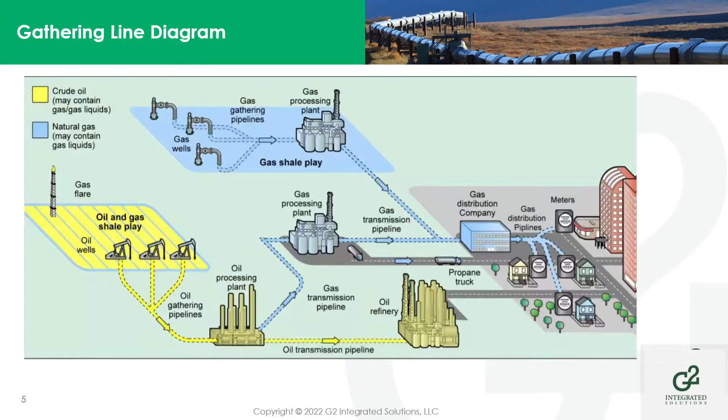So as currently defined in 49 CFR 192, gathering lines are considered to be pipelines that transport gas from production facilities to transmission lines. This is a graphic that's out of PHMSA's gathering line FAQs. The FAQs do reference the definitions provided in API RP 80. Those are incorporated by reference.

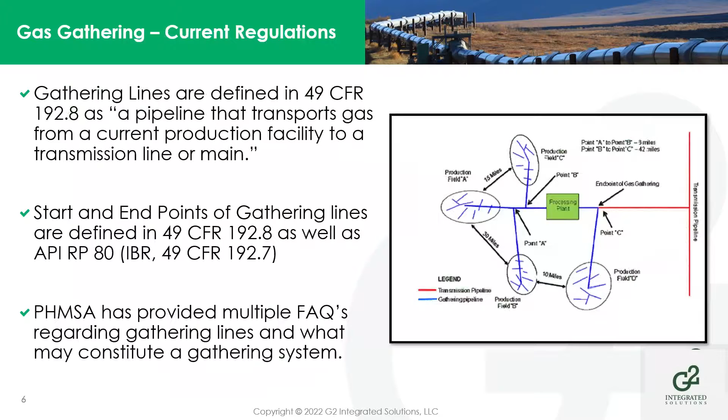PHMSA has provided a lot of these graphical interpretations to help operators determine if they do or do not have regulated gathering lines or what may be considered part of a gathering system. So if an operator is looking for a place to start to determine if they do have gathering lines, the FAQs are a great place for some good information.

So currently, there are two gas gathering classifications listed in the regulations, both of which are limited to class 2 or greater locations. Type A being the metallic with a MAOP of a hoop stress of 20% or more of SMYS, and then non-metallic with the MAOP of greater than 125 pounds. And then the type B is the same, they just have different classifications for the location of the area.

So for a large portion of these gathering lines that are located in remote areas, they don't really ever come into play because they're not located in a class 2 or 3 or 4 location. And so what PHMSA has done is they've expanded the requirements for these gathering lines to bring some of these more regulated lines into play.

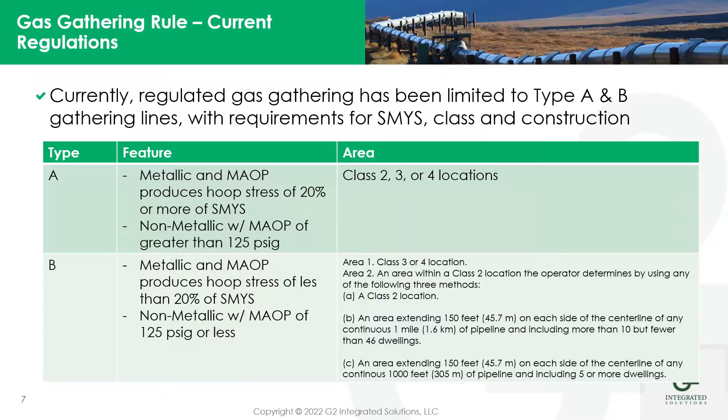applicable. Again, I just want to reflect the fact that this is a fairly marked change, as there are going to be a large amount of unintentional operators that don't realize that they're going to be part of this regulation. So if you're aware of any operators that have historically never been subject to regulations, reach out to them, let them know that, hey, these are coming around and they should take a look and see if they're going to be affected.

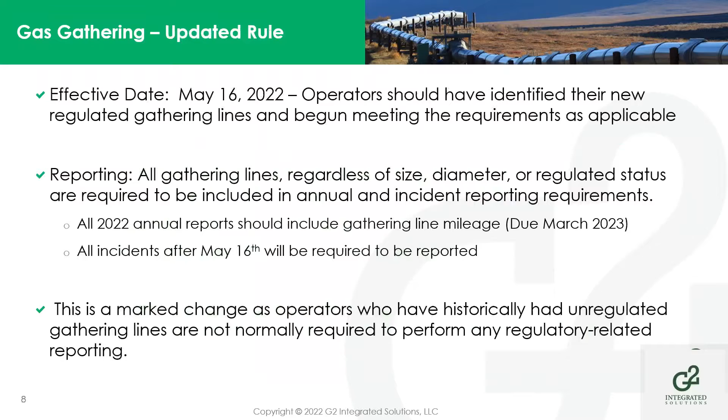So the first part of the gathering line rule talks about reporting. So the update in 49 CFR 191 provides the requirements for reporting for gathering lines. This includes annual reporting under 191.17, which is applicable to all gathering lines, type A, B, the new type C, and the type R lines. 191.23 for safety-related conditions is for type A, B, and C gathering lines, not the type R lines.

And then just as a point of reflection here, 191.29 for the National Pipeline Mapping System, operators of gathering lines are not required to add their maps for the gathering lines up to the NPMS system. They're still required to retain maps for their lines, but they're not required to put them into NPMS.

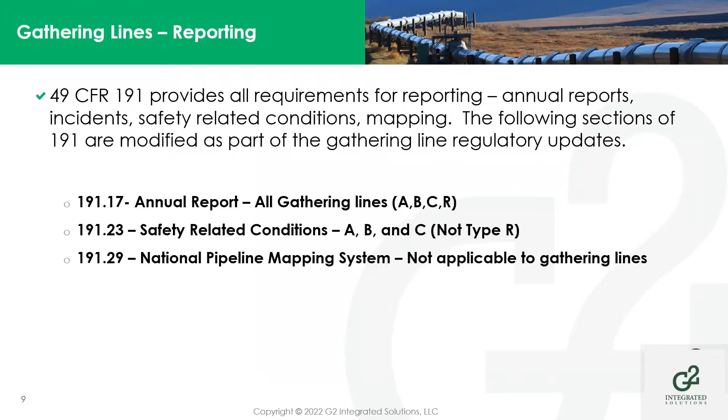So we talked about type C and type R. What do they mean? So again, the new rule creates both the type C gathering line and the type R gathering line. Type C lines are considered to be those gathering lines with an outside diameter greater than or equal to 8.625 inches and any of the following. So it could be any of the following three classifications. They're either metallic and they have an MAOP with a hoop stress of 20% or more of the SMYS.

If they have an unknown stress level and they have an MAOP greater than 125 pounds, or they can be non-metallic, plastic, composite, and the MAOP is greater than 125 pounds. So this expands the larger diameter, higher pressure gathering lines. This brings those into play here under regulation. And then the type R lines. Type R lines are pretty much any onshore gathering line that doesn't meet the existing A, B, or C definitions. So those operators of type R lines are required to report those lines as part of an annual report, but otherwise don't have any other additional requirements that they're going to have to meet.

And so additionally, the preamble of the final rule defines incidental gathering on new, replaced, relocated, or otherwise changed gathering lines. So the applicability for incidental gathering was done to avoid some disruption that's associated with reclassifying some previously unregulated existing gathering lines as transmission lines, and hopefully reduce the overall cost of the final rule for the existing infrastructure. This incidental gathering exception will be limited to 10 miles or less.

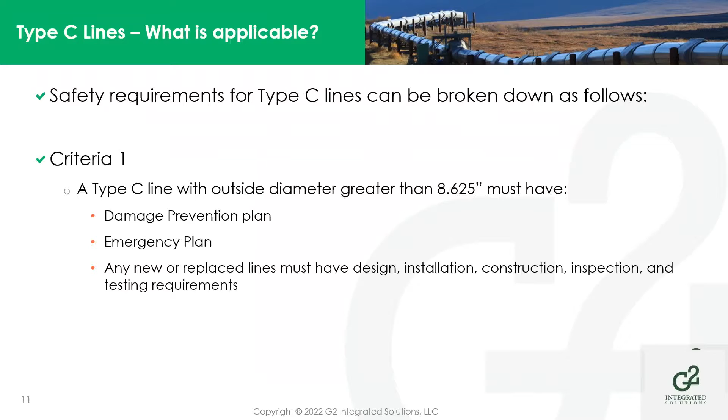And then on top of this, PHMSA has added a couple of different layers of additional regulations. So the second criteria applies to a type C line with an OD between 8.625 and 12.75 inches. All of the requirements of criteria 1 for the type C lines apply, and then additionally they're required to have a public awareness plan. They're required to install line markers. They must have a corrosion control plan, and they must conduct leakage surveys. So all of these items are to be conducted in accordance with the existing regulations in 49 CFR Part 192 as applicable.

There is something here for the level 2 and level 3 criteria called a PIR exemption. So the potential impact radius exemption is a gathering line where the segment does not have a BIHO or otherwise inside the PIR. And the PIR is calculated using a different factor. So normally, the PIR is calculated with a factor of 0.69. This new rule requires you, if you want to use the PIR exemption, to use a factor of 0.73. So it gives a more conservative estimate of the potential impact radius. So again, these exceptions are there for those lines that may be in very remote areas where there's not a problem with having anybody inside of that potential impact radius.

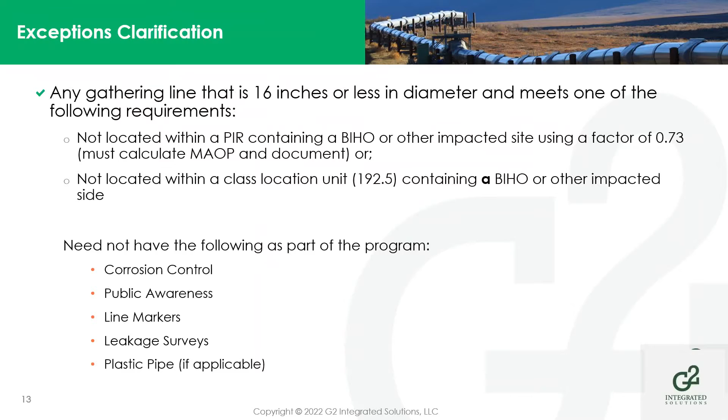And then finally, the third layer, the third criteria of type C lines are any line that has an OD greater than 12.75 or less than 16 inches, or anything greater than 16 inches. So if you're greater than 16 inches, you have to do all of these things, and there is no PIR exemption. If you are between 12.75 and 16 inches, you have to do these things unless you can qualify for the PIR exemption. Again, you must meet all the requirements of the type 1 and type 2 lines.

You also must establish an MAOP in accordance with 192.619 and maintain records. So you're required to have your strength testing and your MAOP records in accordance with the existing regulations. And then if the line is or contains plastic, you have to meet all the requirements for plastic pipe, except for if you're using a composite material, and we'll talk about composite materials here in a short second.

So compliance dates, what does this mean? When do we have to come into compliance with this rule? So by November 16th of 2022, so effective 6 months from the effective date of the rule, we talked about the effective date being May 16th. So operators must have identified all of their type C lines and started to bring them into their pipeline safety programs if they are applicable.

Compliance with the entirety of 192.9, which is the new gathering rule, is due 1 year from the effective date, so May 16th, 2023. PHMSA has also provided an alternate date if you request that alternate date approval. You have to submit for that alternative deadline 90 days prior to May 16th, 2023 if you request that. So if you are looking at your lines and you determine that you can't come into compliance by May 16th, or that you request more time, you can submit for an extension from PHMSA. You must submit some additional information in order to do that.

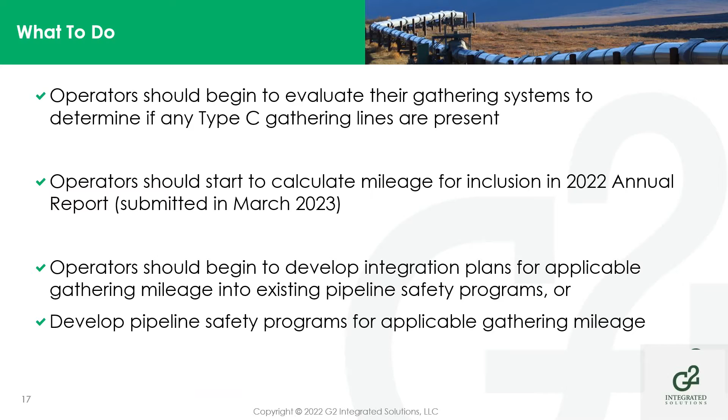So that's the general presentation. Just wanted to kind of review the rule, review some actions to take right now. I'm going to open it up to our panel and see if anybody has any questions.

So we do have a couple questions here. Let me see. It says, am I required to map my gathering system and run class location analysis to satisfy the requirements of the final rule? I'll go ahead and take a shot at that one, Marissa. Okay. The bottom line is that you are of course required to retain maps of your systems, right? But you're not, according to the final rule, required to submit mapping data to the National Pipeline Mapping System.

So your maps may not be fully up to snuff, but the thing to understand here is that you can make a rough determination of your type C lines just based purely on diameter and percentage of SMYS, right? And bearing in mind that class 1 basically is anything that's not class 2 or 3 or 4. And if you don't have any structures, buildings intended for human occupancy anywhere near your lines, then you're going to be in class 1. Right, so you can get started on it without necessarily having detailed maps of your lines.

But bearing in mind that from this point forward, you do have to be paying attention to changes in class and really managing your system from that standpoint. You really should be looking at getting your gathering systems adequately mapped from a GIS standpoint as quickly as possible. And just as an aside, our gas HCA tool has already been updated to calculate type C and type R. So, you know, the software tools that we have are already updated for that.